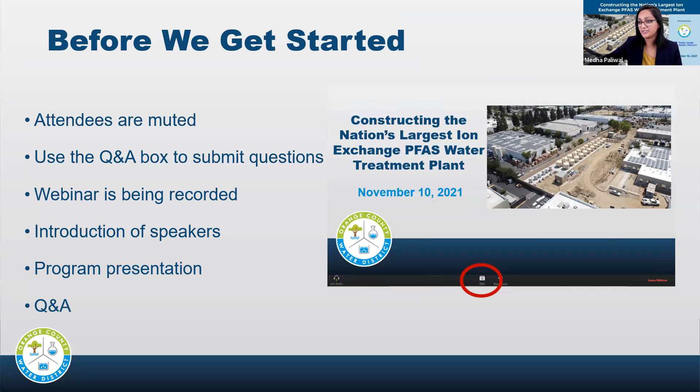So without further ado, I'd like to introduce our speakers for today. They'll give their presentations and then we'll do a Q&A at the end. So Chris Olson is the Director of Engineering for the Orange County Water District. Chris oversees the activities and operations of the engineering department and manages a variety of engineering projects for the district, including determining project feasibility, preparing requests for proposals, selecting and managing design and construction consultants, determining project schedules, and much more.

Director Steve Sheldon has been an elected member of the OCWD Board of Directors for 16 years, currently serving as president. He was previously president of the board in 2008 and 2009. Director Sheldon has more than 25 years of experience in public policy and real estate development, managing hundreds of land use entitlement efforts before cities, counties, and special districts.

And Roseanne Weston is the engineering manager at the Yorba Linda Water District. She is licensed in 2 states and has over 30 years of experience in the design and management of water and wastewater facilities, including a $1 billion capital improvement program. As head of the district's engineering department, she is responsible for managing the planning, design, and construction of water and wastewater facilities. So I will now turn it over to Chris to begin the presentation.

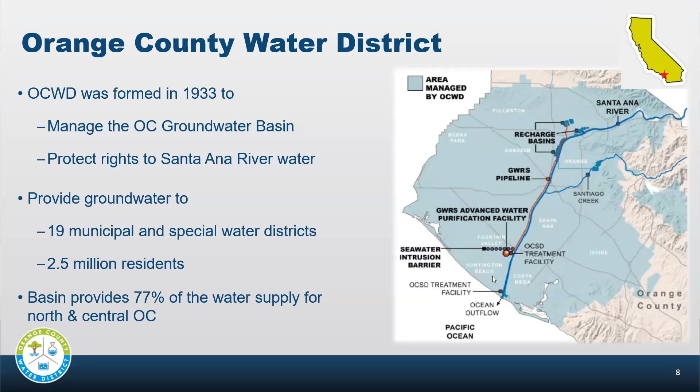Just want to talk a little bit more on the GWRS. That water is secondary treated wastewater from our next door neighbors, Orange County Sanitation District, who now go as OC San. We treat that through an advanced water purification process: microfiltration, reverse osmosis, ultraviolet light. And that water is used as indirect potable reuse. We want to point out there is no PFAS in the RO water. That is a very highly effective way to remove PFAS. Next slide.

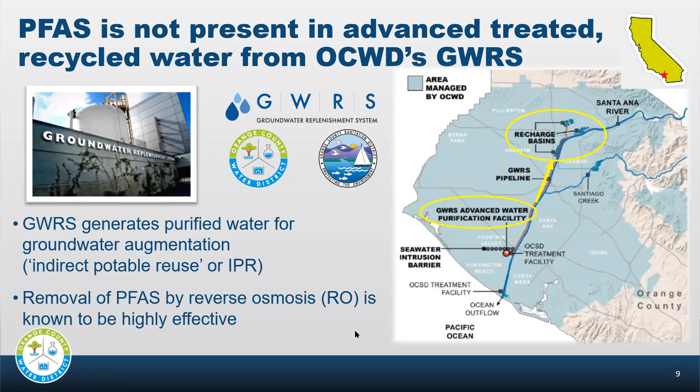Okay, now we're getting into the extent of PFAS impact in our service area. PFAS, per- and polyfluoroalkyl substances. It's the carbon-fluorine bond in the compounds. These notification levels, in parts per trillion, were just recently set by the California Division of Drinking Water for PFOA, PFOS, PFBS. Our driver is PFOA. That's where you have the notification level of 5.1 parts per trillion, nanograms per liter, same. Response level is 10. That's been our driver throughout our producers, the one telling us something has to be done.

I also want to point out that the public health goal process has begun, which is part of developing the maximum contaminant level. We expect that MCL to be available in the next 2 to 3 years. So who is impacted? We have 11 retailers, we call them producers, in our service area impacted by that 10 parts per trillion PFOA response level. That equals about 1/3 of our total groundwater basin. So about 100,000 acre feet a year is currently unable to be served because of the PFAS concentrations in their wells. They have to make up that water by purchasing more expensive Metropolitan Water District import water.

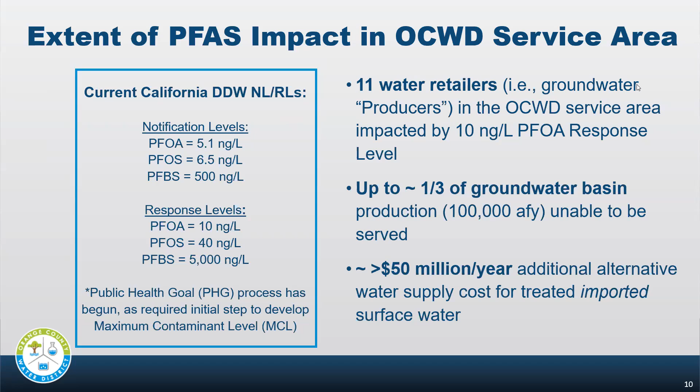So we made the decision to take the lead in determining what would be necessary to get the producers back in pumping, get the PFAS removed. What can we do? How fast can we do it?

Next slide. So 2019, we started a planning study approach. We put it out there to whoever was interested. We had 10 originally come on board to be part of the planning study. And what that did, we hired Carollo Engineers to be part of this with us. And with them, we reviewed all of the laboratory data, we performed site inspections, we developed treatment alternatives for each of the sites. And this was done for 10 of our producers.

So each one of them had a report, extensive site visits, data evaluation, and we prepared these alternatives. It was based on size and cost and what their availability was for real estate to have treatment. And then we quickly learned that because of site constraints for the majority of these sites, ion exchange treatment was going to be the most preferred over something like granular activated carbon, where you could have, let's say, 4 vessels for ion exchange, and it might take 8 to 12 vessels for granular activated carbon. And it was also more preferred over something like reverse osmosis just because of cost.

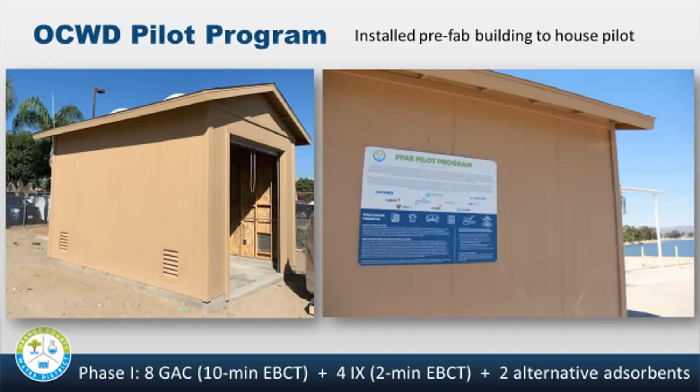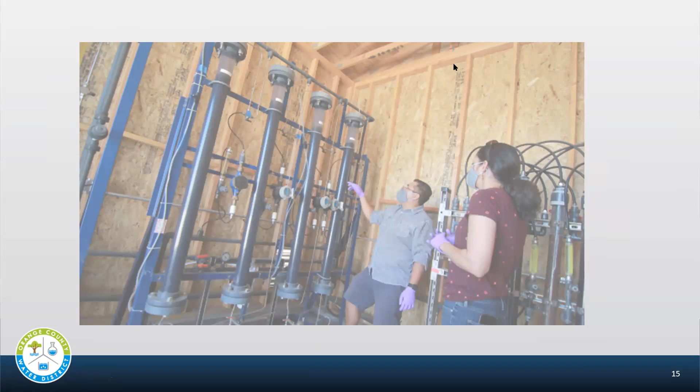Next slide. So also in 2019, staff developed and our board adopted a PFAS policy. And that policy was for OCWD to provide the design and construction for treatment facilities. With that, we also realized, okay, what would be the biggest item here lead time wise? I figured it's got to be these vessels. These vessel systems are 12 feet diameter, 16 feet tall steel vessels. That's what holds the media.

So we decided we're going to pre-purchase 55 of these vessel systems. We did that with Evoqua and OCWD. And this was a great decision. This worked out very well. It saved us millions of dollars and a lot of time. Basically, these vessels have been ready to go as our construction progress continues. The contractor says, I need the vessels at this date, and we have them available.

What we also did at that same time was say to our board, we need to provide on-call consultants so we can get design work going. So we awarded 6 on-call design consultant contracts. That gave us the ability to start design quickly. And we also saved a lot of time and money with that, as well as with the vessel system pre-purchase. Next slide.

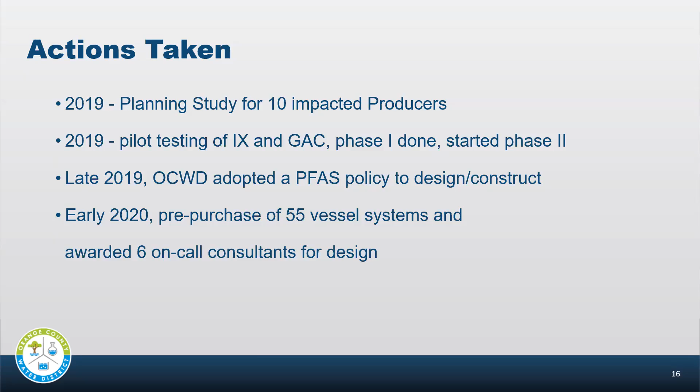So getting into restoring the drinking water source. Yes, design and construction are underway. We are working with 11 producers right now. That's the extent of what's currently impacted, 11. OCWD is paying for 100% of the capital cost. That's the design, that's the construction. And we're paying for 50% of the O&M costs, which is up to $150 an acre foot per year. So half of that is $75 per acre foot that we're providing.

And then we came up with a goal. We said that we wanted to have all these systems online within 2 to 3 years. So that's been part of the process of pre-purchasing, the piloting, knowing what media work best, having equipment available, having design moving relatively quickly, and then getting construction moving as fast as we could too.

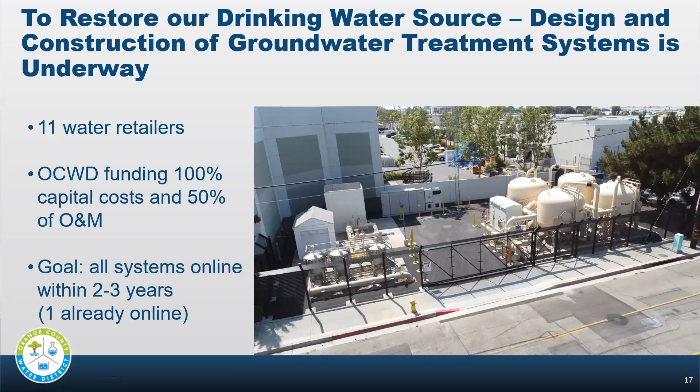You can see a site like this, it's a very tight site. On the left, the well is in the background and the 3 pre-filters are in the foreground left. And then you have your 4 vessels, which are in 2 systems lead lag. And then there's some disinfection and it goes right into distribution for its customers.

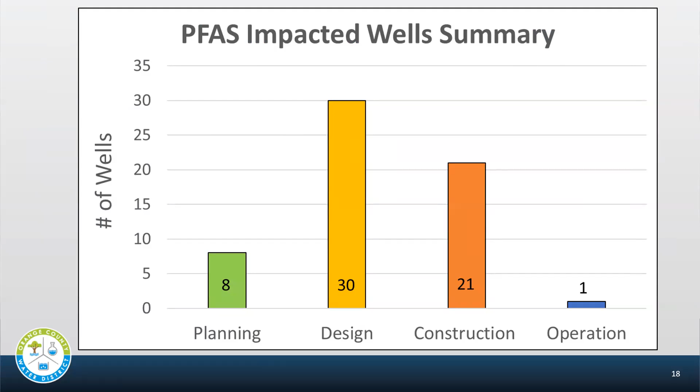Next slide. So even though I'm saying we have a certain amount of systems, here's a total of what the well summary looks like. We have 60 impacted wells. 8 are in planning phase right now, 30 in design, 21 in construction, and 1 in operation. And we're going to be having several more in operation relatively quickly. Next slide.

So our current activities, we have 10 treatment systems currently under construction for 4 producers. So top right, you have Serrano Water District. This is a 4 system, a two vessel system for 2 wells at Serrano Water District. And this is also ion exchange. This one, we actually recessed the vessels a little bit because they're literally right next to neighbors on the left and right, all around them. Their water district headquarters is right in the middle of a residential community.

We also have Garden Grove well 21. So Garden Grove has currently 5 wells at 4 locations, and the 21 site is the furthest along. It's going to be in operation within the next month. Serrano is going to be in operation by the end of the year. Yorba Linda Water District is going to be in operation in December. So we got a lot going on.

We currently are out to bid. Actually, we just received bids yesterday for East Orange County Water District. That'll be the next one to start construction. And then we have design ongoing for 6 other producers. So just a lot of items, a lot of design, a lot of construction going on. And again, this is what we're doing over the next 2 to 3 years to get these producers back to pumping their 77% groundwater instead of purchasing imported water.

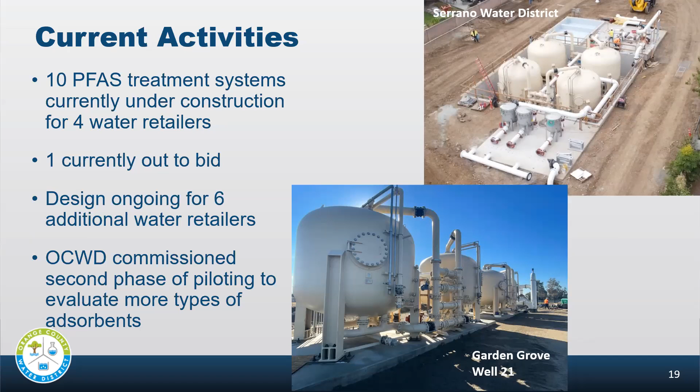And also wanted to mention that we did start the 2nd phase of our piloting. So what that does is some of these vendors are coming up with new products, new resins, or they have something that they feel works better. And we're trying them out. We went through the phase 1, we got some good results. We know what works. Now we're looking at what could work better, what could be more cost effective, what could be longer lasting. So that's what phase 2 is doing. So we're just going to keep trying different things out and learning more from it as we go along. Next slide.

Okay, now I will turn it over to OCWD's Board of Directors President, Steve Sheldon. Don't hear you yet, Steve. All right, wonderful. So I apologize, Chris, and thank you for that good presentation, and Meta for the work putting this together, and Rosanne from the Yorba Linda Water District, the presentation to come that'll be really good and technical.

I'm going to just speak for just a couple minutes and go over the federal legislative situation that we have with the Congress now addressing the PFAS issue. They have legislation that will make PFAS a hazardous waste, and it would be subject to CERCLA, which is the federal hazardous waste law, so to speak. And in CERCLA, anyone that comes in contact with the PFAS, if they buy property, even though they didn't pollute the property, if they were in ownership in the chain of commerce or in any way, I'll say, touches it, there's a likelihood that you could be brought in as a polluter, even though you had nothing to do with it and didn't manufacture or sell it.

So we need to have an exemption because as the water district, we are treating the PFAS and we'll be transporting the resin for incineration. We need to have that. We are concerned that the polluters that caused the problem, and we're cleaning up their mess, might somehow point the finger at water districts or wastewater districts who are doing the public good. And so we need to have a specific exemption. And you'll see here in the slide that there's the PFAS Action Act, HR 2467, and we need to have an exemption there that calls out water and wastewater agencies.

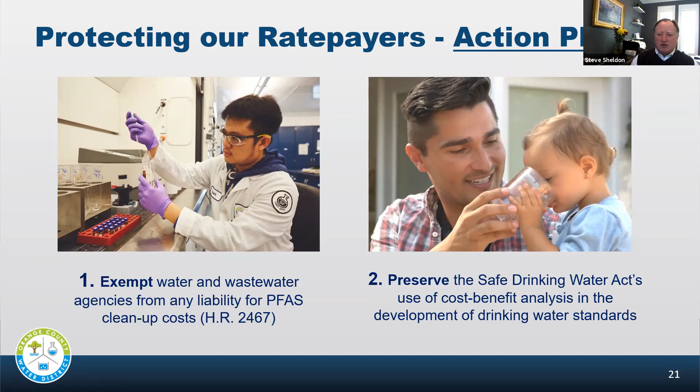Great. So how can you help? What we would ask is, and I'm speaking to those that are here in the webinar from Orange County, from California, and even from the nation, we need letters into the Orange County congressional delegation and the California senators regarding the 2 items that we mentioned. We've drafted letters for your pleasure to look at and massage if you'd like.

And for those that are with an agency or with a city, we have a draft resolution that our board has passed. Other water districts have passed this resolution. We would ask that you would submit this to your agency or city or county to pass it as well. And if you're outside of California, but in the United States, please, you're going to be affected as well. If you're on here, you're concerned about it. And this affects everyone here in the United States. And we'll email the participants this resolution and this information.

We have some participants that are outside of the country in Israel and Australia and Belgium and others that I noticed on the registration. And so we'd like to say, be concerned as well about what's happening there as you go to clean the PFAS from your water, if you should have it there.

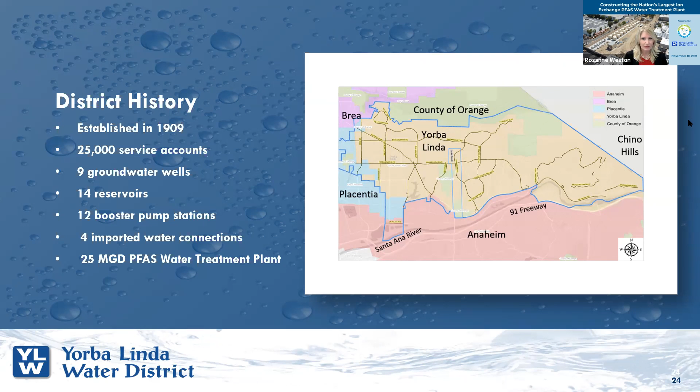So as Chris mentioned, actually before we engaged consultants, we were doing our own research here at the district, trying to figure out what's the best technology, what's the best media. So when OCWD entered the picture, we'd already kind of had a good understanding of what would work for us. We went on some of these tours with our engineering and operations staff together, which is really critical to do because operations, they're the ones who are going to inherit this plant, and we want to make sure it works

for them. Also, one of our directors, Dr. Wayne Miller, he's an engineer and he's a professor at UC Riverside. And he accompanied us on those tours and led some of them. And he's been really instrumental to the success of this project.

But we decided early on, RO would not work for us, too expensive. We didn't want to deal with the brine. We looked at the GAC. We'd need more vessels with GAC than ion exchange. So we went with the ion exchange. GAC requires a backwash system, so that's a larger footprint, more vessels. That means more money for both capital outlay and O&M costs.

Chris told you about the pilot study results. It shows that ion exchange, at least on our water, does better than GAC. And we were concerned about the short chain PFAS compounds that are going to be regulated. And ion exchange tends to do better on that. Plus our flows, they vary a lot from day to day and during different parts of the year, from 8 million gallons per day to about 25 million gallons per day for groundwater. And the ion exchange system, it just works better with that flow variation.

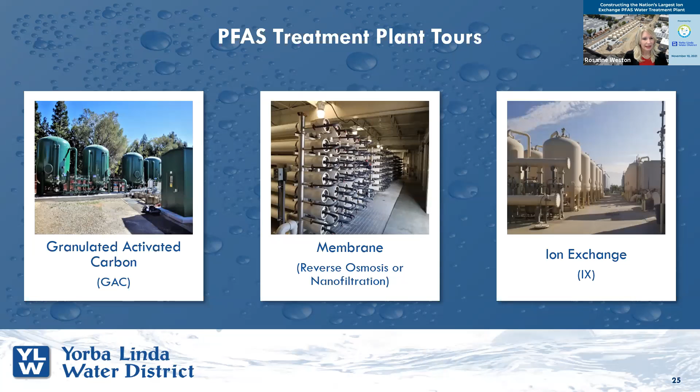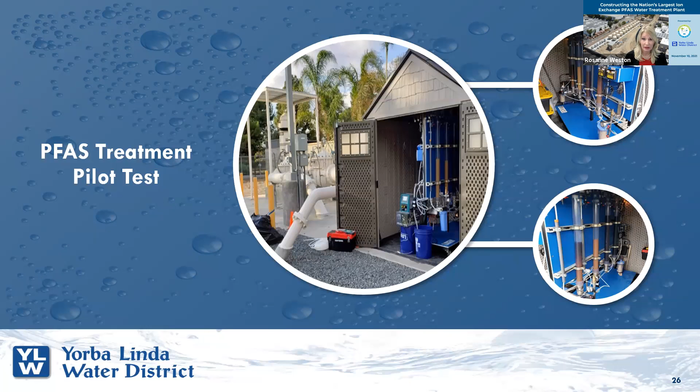And we conducted our own pilot test on our water, and we found that's very important, and it just really matched up with OCWD, so we're very happy about that. We piloted 3 resins, Evoqua's, Purolite's, and ECT2. ECT2 helped us put this together along with the others. And so we were able to demonstrate that these resins work well with our water. And that was very important for the state because it gave them a sense of comfort that this technology applied to removing PFAS was going to work along with these resins.

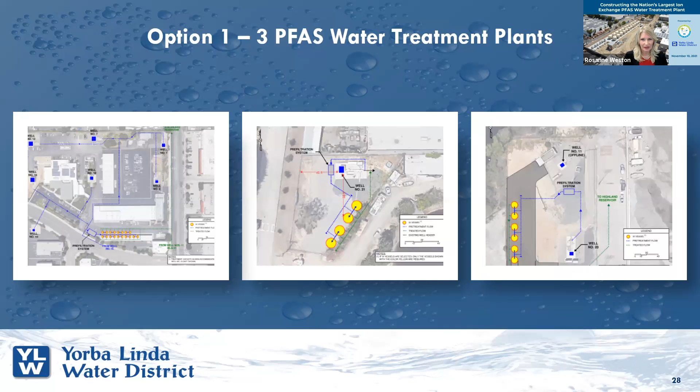Next slide, please. So we looked at many options. One was actually locating treatment at 3 different locations. Now, most of our wells are at our headquarters, and that was an option to put some treatment there, and then some treatment at some wells that are located down near the recharge basins at the Santa Ana River. And the only problem with that is we had to have a lot of redundancy, and that would require 28 ion exchange vessels. So next slide, please.

We then looked at our headquarters, and this is the option we went with, to have just 1 treatment plant and to bring all our flow to the treatment plant. And we'd only need 22 vessels. And fortunately, we had a way to route the flow from our offsite wells to our headquarters, since we have a pipeline that goes right by our headquarters. And with fewer vessels, the capital and O&M costs would be less. And fortunately, we had space at our headquarters. We had to give up parking, but it really worked out.

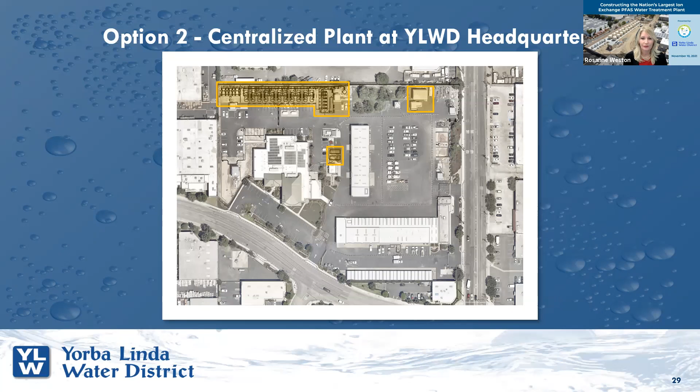And also during our high and low flows, we could just circulate flow through all the vessels and not worry about the vessels being offline and any bacterial issues with keeping vessels offline. So we also blend flows for other constituents to maintain good water quality. And one plant made it just easier to do this. And although our plant will be run automatically based on water demand, and we'll monitor it by SCADA at our headquarters, it just really makes it easier for our operations staff to just walk outside and make sure everything is working properly. Next slide, please.

So the total budget set aside by OCWD is 27 million for this project. And we predict, at least at this point, that the O&M budget is going to be about $150 per acre foot. With our projected groundwater use, that's a little over $2 million per year. Now, we'll know once we turn on the system and we get it up to full capacity, we'll have better

costs. So design was completed pretty quickly in 9 months. Construction is going to take 1 year, and we should be getting our permit from the state this month to operate the plant. We'll be serving water in mid-December, as Chris had mentioned, and we plan on bringing the plant up slowly along with the wells that have been off for a long period of time to work out any of the kinks. And this works well because our demand is generally lower right now for water, and then it gears up during the summer.

So we have a ribbon cutting ceremony that will be coming up. So I say stay tuned for that.

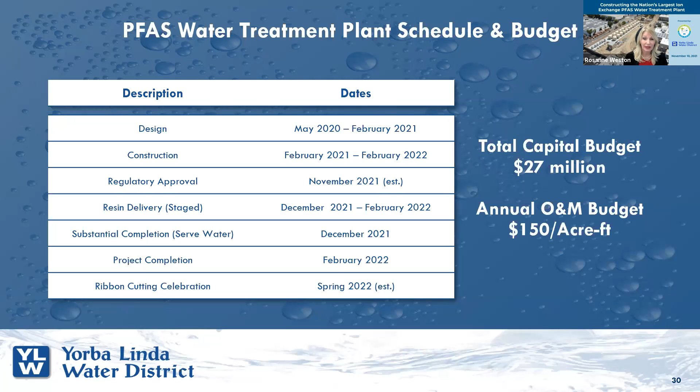Next slide, please. One thing that was pretty cool is Tetra Tech came up with this 3D model very early on in the design. And 45 people from our district got to put on these Oculus glasses and just really walk through the plant. I can't say how valuable this was. It just brought everybody in. Everybody could see it. Most engineers love looking at plants, but everybody else, they can't make heads or tails.

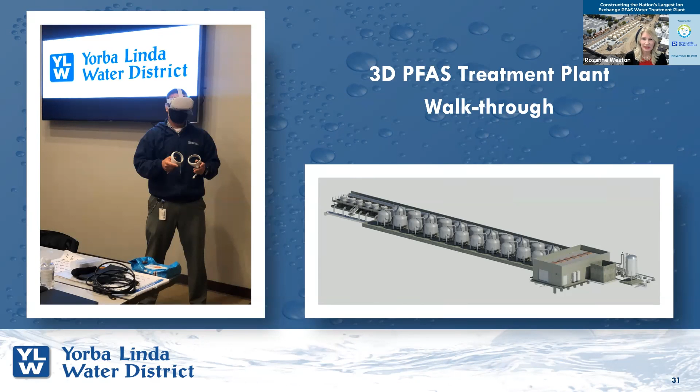I shouldn't say everybody else. A lot of people have trouble interpreting plants. And so we were able to walk through it, and it really helped for the operations folks because we actually made design changes as they were walking through the plant, you know, regarding layout, spacing, and so forth. So that was really valuable.

Next slide, please. Now, I'm not going to go into each of the trains, as Chris already touched on how these operate, but here's just a close-up of a pair. So we have 11 pairs of vessels, and the pipe, and these hold resin, and this will basically treat the water. So the piping gives us a lot of flexibility so that we can efficiently use all the resin to treat the water and keep our costs down. Each vessel will be filled about a quarter of the way up with the resin.

We'll have 10 trains, 20 vessels filled with Evoqua's resin, and we'll have 1 train or 2 vessels filled with Purolite's resin. And we're going to kind of do a side-by-side, and we're going to compare these results with the pilot testing results and maybe even a bench scale test that's new for resins and see if we can correlate those results. That would be very helpful for all of us. And then we can evaluate performance immediately, even before we put it in the vessels.

And the state will require us to test for PFAS when we start up the plant. Then we go to quarterly testing and then monthly testing as we get closer to the end of the resin life and to change out. So next slide, please.

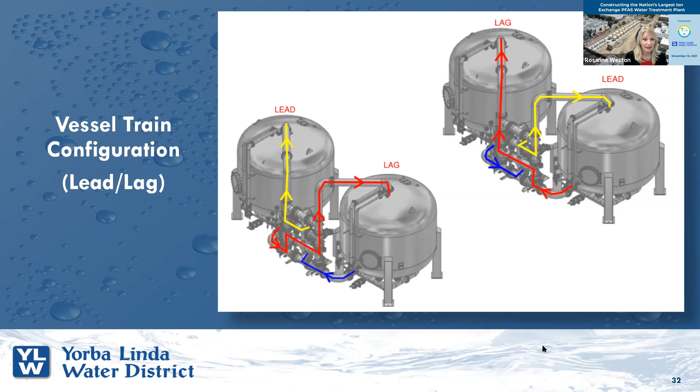So here is our plant as it stands today. I'm about to show you a video taken from our drone. And our production superintendent, he videoed this for us. We're very fortunate. But first I want to point out the following. On the far left, you'll see our 6 pre-filters. Now these filters take out anything that may negatively impact the performance of the resin. And they're about 5 million gallons per day capacity each. So they're 5 and then 1 spare.

And then this is followed by the 11 trains or 22 vessels that are 12 feet in diameter and about 16 feet tall. And that's followed by what you'll see in the video is the booster pump station that has 600 horsepower vertical turbine pumps with VFDs. And you'll also see in the video, we installed 2 emergency backup generators, one for the plant itself and one for our headquarters, which we upgraded, and some new chlorination facilities. Those were at the end of their useful life and we really needed them. We will be paying OCWD back for that.

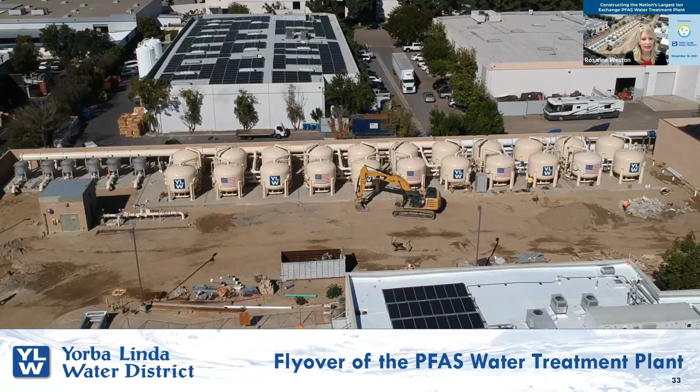So this plant will be permitted for 19 million gallons a day, but we'll have the ability to ramp up to 25 million gallons per day. Next slide, please. Oh, I'm sorry, we'll go with the video.

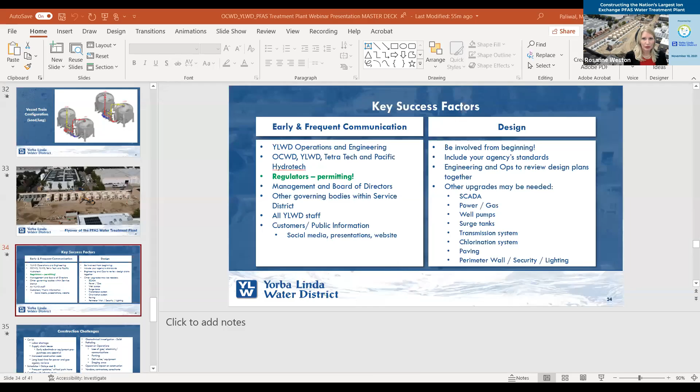So this has been a very successful project. We're in the home stretch. What we found is communication has been key. Even though OCWD is managing this project, we worked very closely with the team as if we were managing it ourselves from day one, from design through construction. And we've met weekly, all the way through.

And we've garnered support from all of the stakeholders. Everybody's come to our meetings. We keep everybody abreast of what's going on, including the state. And they've been very involved from the beginning. So I think they've developed a level of comfort that this is going to really do what it needs to do, which is to remove the PFAS.

So one of the things in design is a lot of people leave out operations when they're designing plants, but they're the ones, as I mentioned, inheriting this plant. We want to make sure it operates the way they want it to, and otherwise we'll never hear the end of it. But they were there every step of the way with us in every single meeting.

So in addition, it's important to realize that you're not just building a plant, especially at your own facilities, like a headquarters. We had so many other things that we had to fix when we were going through here. Like I said, the chlorination facilities had to be upgraded. They're at the end of their useful life. We took advantage and replaced the wall.

That wall was not seismically upgraded or anything. We had gas lines that needed to be replaced. And so we were taking care of some of these things, and obviously we'll reimburse OCWD in this project, but it's important to take care of those things. All right, next slide, please.

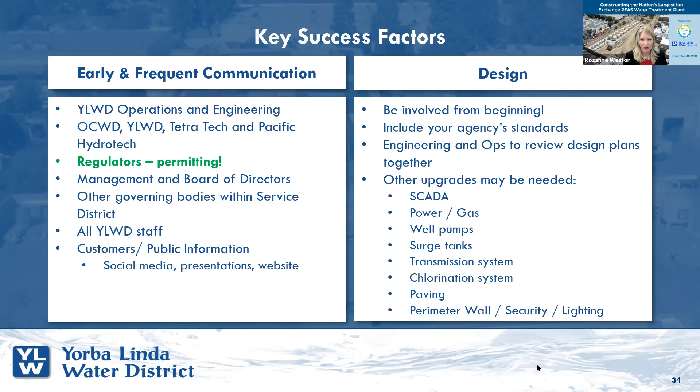So we did run into a few challenges, and our project was actually delayed by 2 months. Supply chain issues are real. We're fortunate that OCWD purchased the vessels ahead of time and some of the other equipment up front. Also, word of caution, build in extra time for your gas and electric companies to put their plans together if you need that, and any permitting agencies, because we found that they were often still working from home or short-staffed, and that can severely impact your project.

And I would say, don't assume that your as-builts are correct. We found many surprises in our yard. When you don't have a new site and you're dealing with an existing site, you're always going to find that. Plus, we had sugar sand, and if you know anything about sugar sand, if you try to excavate a trench, it just collapses. So we had conflicts with electrical and gas utilities, a communication fiber optics line broken, some other pipelines encountered.

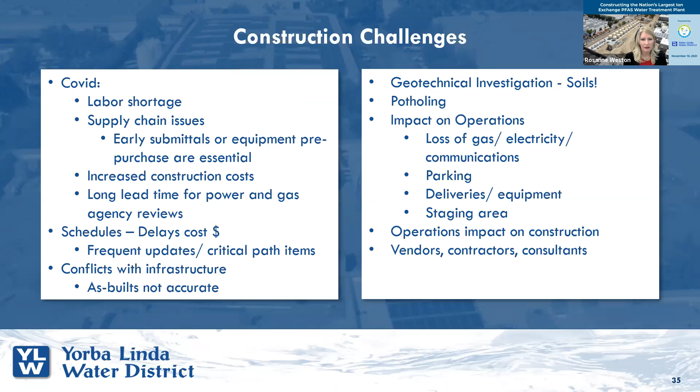We've had some power outages, SCADA and communication outages, and that always seems to happen when you're off work on weekends. But I have to say that overall, we've had a great team, great contractor. We've worked it all out together, and we're very pleased with our new plant. Next slide, please.

So I just want to give a huge thank you to our wonderful team of people who've made this project a success. Our directors, managers, and folks from various departments and our staff have been very patient because, as you can see, our site was really torn up and has been torn up for a year. And everybody from OCWD, from the director level and down, management and staff, they've been wonderful. We're really happy with the work and the collaboration that we've had together, and our consultants and contractor doing a fabulous job. And so with that, I'm going to turn it back over to Meta and Allison for questions. Thank you.

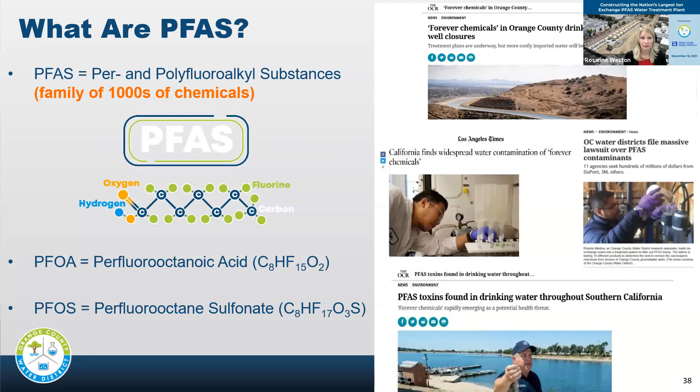Okay, great. And I think I'm going to answer one last question here. Someone says, with so many systems coming online, is there any concern about media availability? There's always concern, but the vendors that we're getting material from have planned ahead. They've ramped their production facilities up. So at the moment, over the next couple of years, there is media available. They are planning for it. They know what's coming and they're prepared.